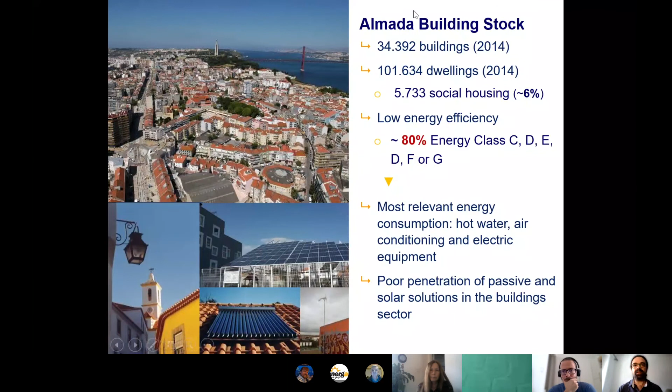This is just an idea of the potential for retrofit in our country. 40% of our buildings need repair, so this is a huge potential to repair and introduce energy efficiency measures. And this is just the number of dwellings that the municipality of Almada owns or manages. There are other national institutions that also have social housing here in Almada.

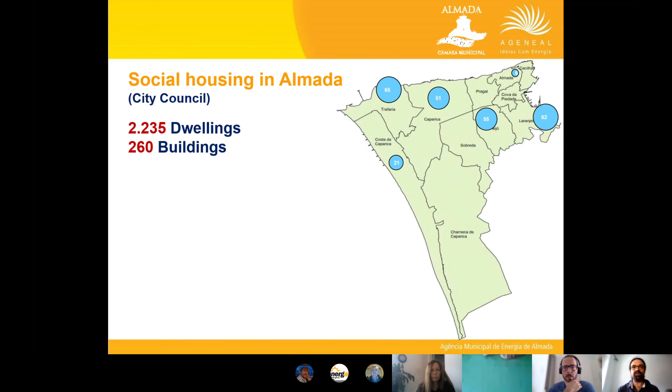The municipality itself has 260 buildings. They are spread across the municipality, as you can see in the map.

This is the two main typologies we have. One, you can see in the first picture, is a kind of normal multi-apartment building, and this represents 95% of the dwellings in the municipality, and it's also quite similar to most residential buildings in Portugal. So it's very representative of what's been done. Although obviously there are some cost constraints in building these kinds of buildings, so sometimes the quality is not the same as the average building, but it's fairly similar.

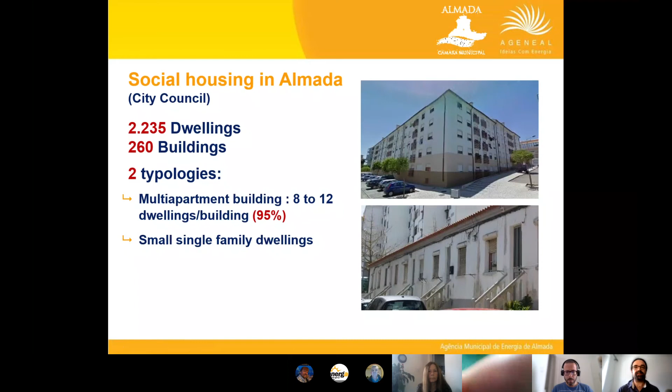And then we have these small single-family dwellings, which are very rare, but we have some - however, we will not address them.

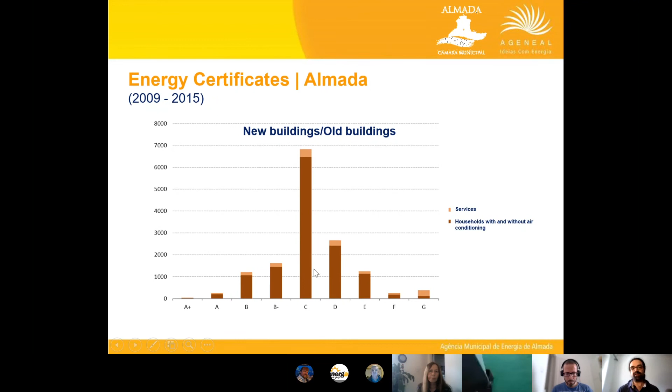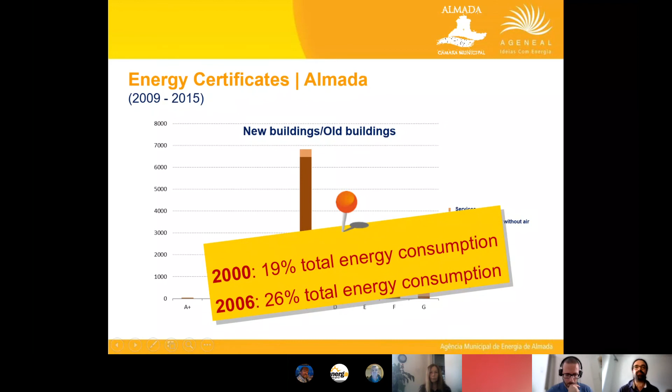So this is again an overall picture. You see that lots of buildings are here in the lower end of the energy efficiency rating, so there is huge space for improvement. The energy consumption in residential buildings has been a bit bigger through the years - I should have some more recent updates, but it's around 26. It has remained stable from this year.

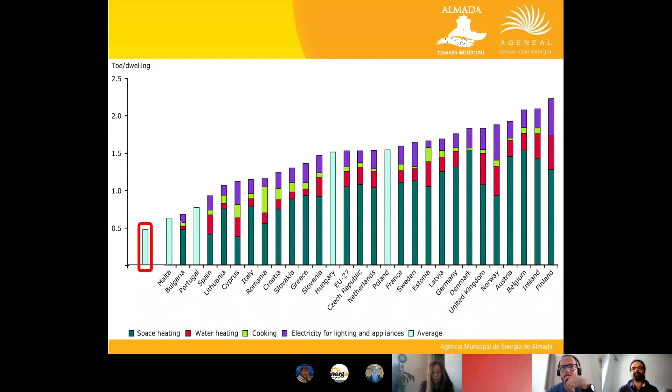This is an old study about the impact of seasonal mortality. Portugal has the highest index in the whole of Europe of mortality related to climate, which is strange because we have very mild weather, but it's explained by the next slide showing the percentage of insulation in houses. Portugal has a very low percentage of insulation. This is an old study, it's much better now, but this was one of the main facts.

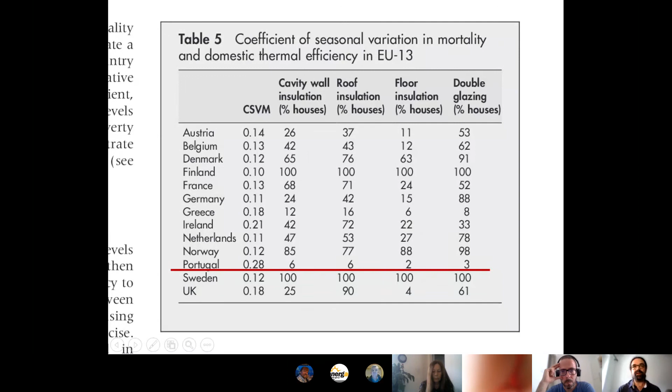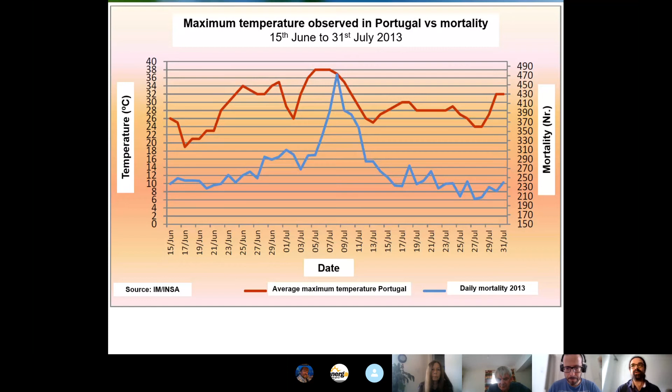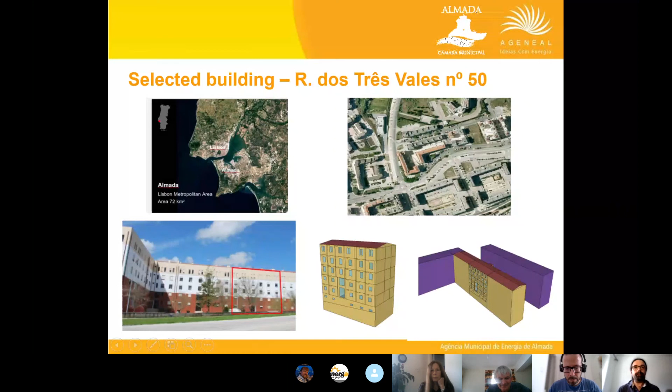Before the intervention, as I mentioned, I won't go into detail, but it was really poorly constructed. So there was thermal discomfort, excessive relative humidity, and also air leakage. We had to address these problems.

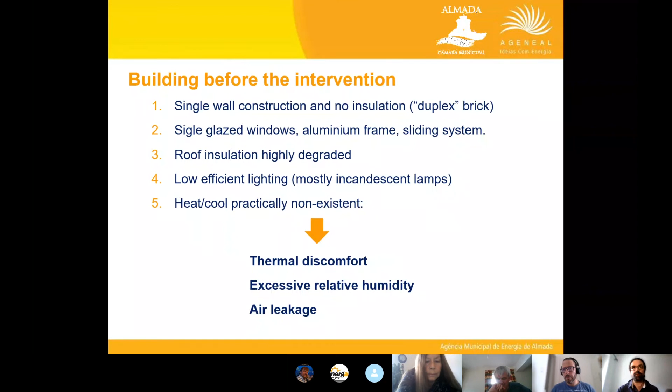This is basically what you can see inside this building. Here you have the windows of the house, which are single glazing windows, very, very drafty. This is the kind of heating you have in a normal house in Portugal - it goes across from room to room. This is the furnace to heat up the water, direct connection to gas.

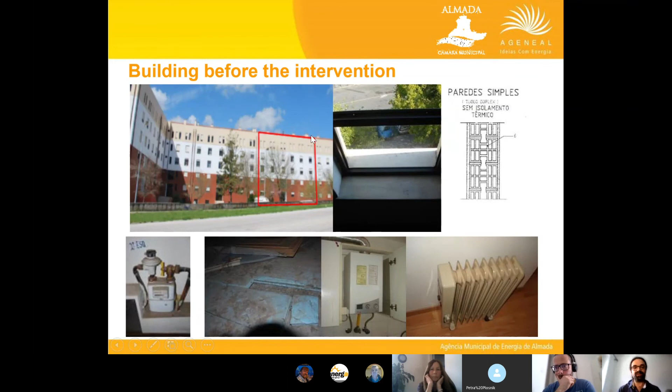And this was the state of the insulation. Actually, there was insulation in the roof, which is good, but it was in very poor condition.

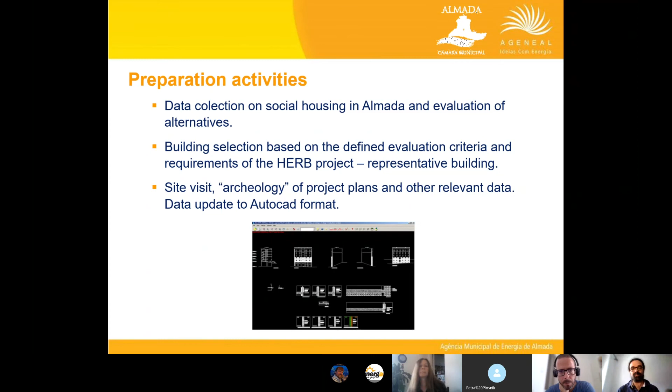So we started to do some data collection. We had to do some archaeology of the plans, because even though this building was built in the 90s, the blueprints were all on paper. So we had to go back and find them and then bring them to digital formats.

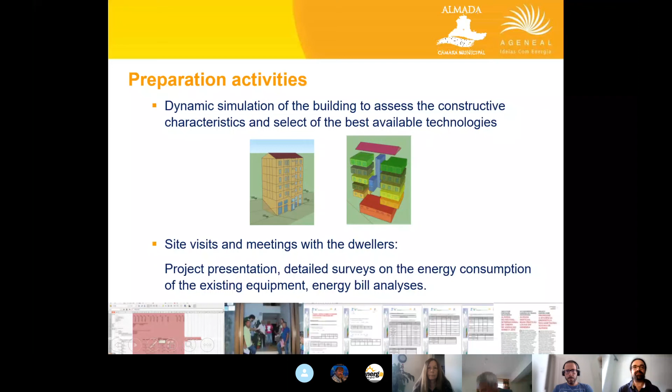What we did there was explain what we were doing, what would happen, that there would be some heavy works in the building, that there would be some problems and issues, trying to get their empathy. Then we also did a huge survey with them, trying to gather as much information as possible to evaluate how things were evolving after implementation.

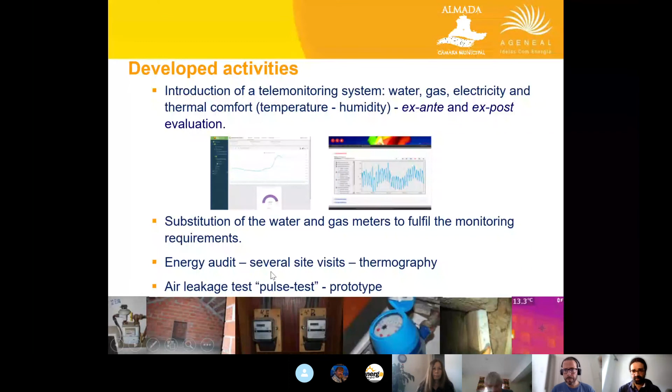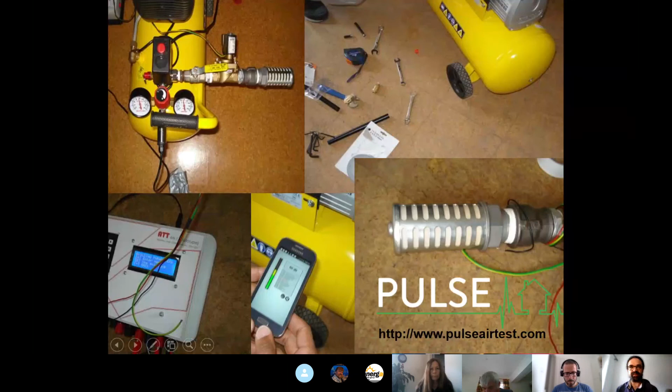A bit more on the technical systems we introduced: some telemonitoring so we could get information on what was going on, replacement of water and gas meters, energy audits, and also this new technology for detecting air leakage. This project involved some technical innovations, but I'm not going into detail on this - obviously it's not the scope of our concept.

So what were the identified solutions and the methodology? Basically, we needed to first get really hard reduction targets. We needed to include innovative technologies, but we had some constraints - we couldn't have any new energy services because people would not bear an increase in their energy bill, even if the house was very well heated.

They would not stand for an increase in their energy bill. There were also some technical restrictions on the available space, and we had to coordinate with other activities existing in the building, namely in the basement there was a kindergarten, a canteen, and a social institution. So we had to coordinate with them.

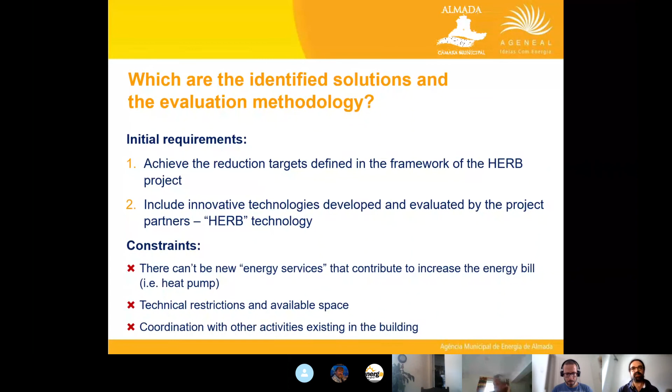We developed some scenarios and tested them using a toolkit developed during the European project that evaluated all the measures in a holistic way. We developed several scenarios with different kinds of technologies to try to define what would be the best, based on our constraints in the building.

I'm already running out of time. This was the reduction of energy savings in the building: 80.6% and 93.6%. But remember, I told you the consumption was very low, so actually this was not the real energy consumption decrease - it's based on what we called nominal conditions.

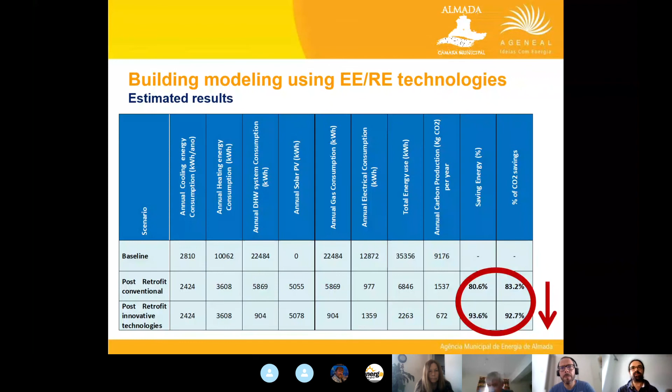If people heated their house, which is the concept we have in our energy efficiency directives, if people heated their house for the whole year, that's how much they would spend. With the new technologies, they would spend 80% less. But this has nothing to do with the real energy expenditure, which went down, but only a little, because they were already spending very low amounts of energy. That's it, basically.

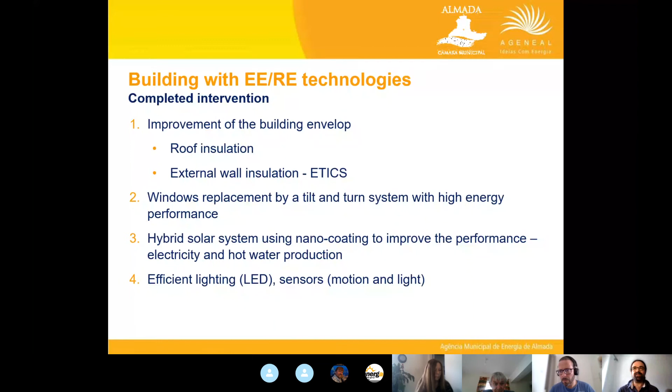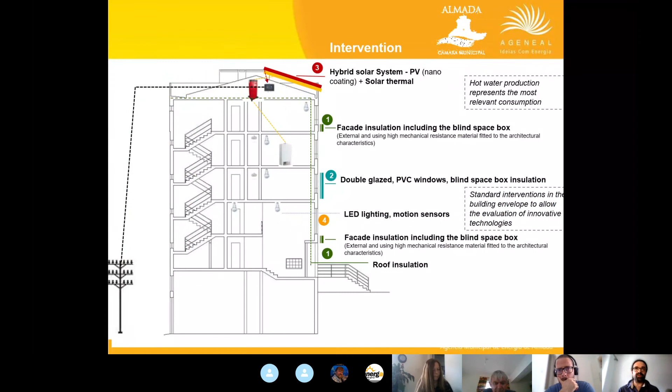So I will skip this part. This is just some of the technologies we introduced. I think we can have a look when we go live into the building, but I'll skip this. Basically, it was facades, and the innovation introduced was a hybrid solar system that I'll show a picture of later.

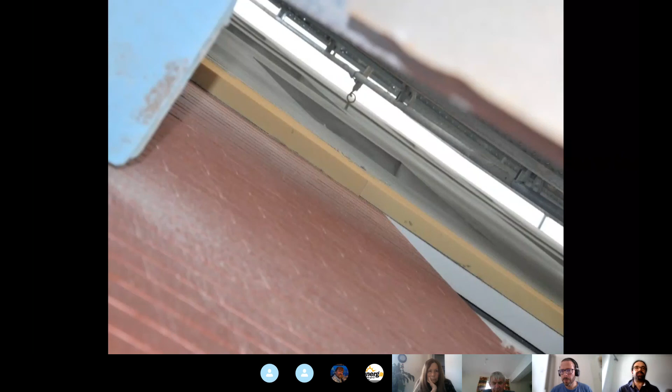We refurbished completely all the facade of the building. This is a picture of the process. Here is the insulation. This was the old wall, and this is the new wall.

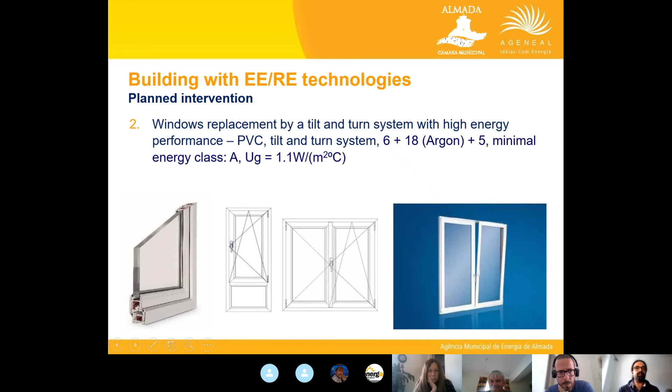And then we replaced all the windows. Here's a picture of the new windows, which we will also see live. These basically had PVC frames, and we had to keep this brown structure for architectural reasons. So the building from outside now doesn't seem like it was intervened, which is quite good. It seems fairly similar to the others nearby, so aesthetically speaking, it was okay.

Then we did this innovative technology, which is a hybrid solar system. It basically heats up water and produces electricity, and it has a coating to improve self-cleaning of the system, which improves efficiency, and it's actually a cheap coating to install.

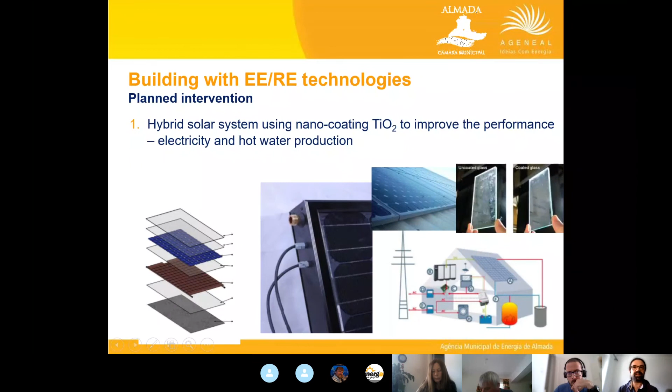So this was the innovative part, and then we gathered all the other more normal installations. This is just a picture of the system we installed there. Some technical details—once again, I will skip this.

Also, we changed all the lighting, also inside the apartments. I had to go with a team to each apartment and check each light bulb, each lamp, each desk lamp, talk to the people about what they would like and what they didn't like, and get LED equivalents in the market. We also spent time with people checking their preferred light colors.

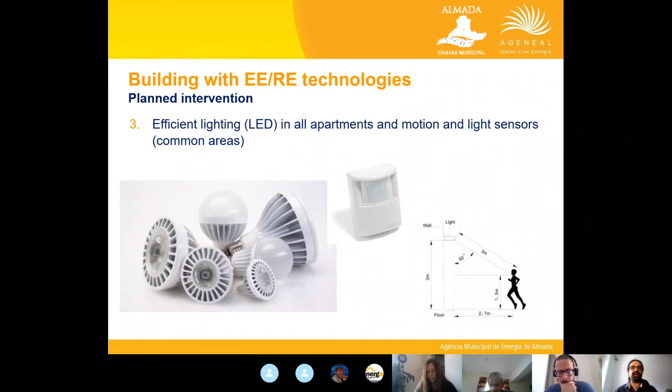Some didn't like white colors, some didn't like yellow colors. We took all of that into account, but for doing this, we needed to be there almost constantly. So every week we would go there and talk with the people and get their feedback on this. It actually turned out quite good, although it was really hard work.

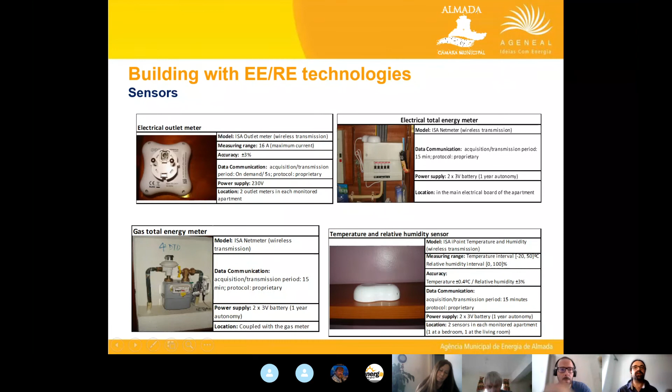Some more technical systems—this is the monitoring system. I'm not going to detail it, but if you have any interest in these technologies, we can share the links and the products themselves. This is actually a Portuguese company that makes these systems. We also gathered data from weather stations, and we had this panel to check how the consumption of everything was evolving in the building.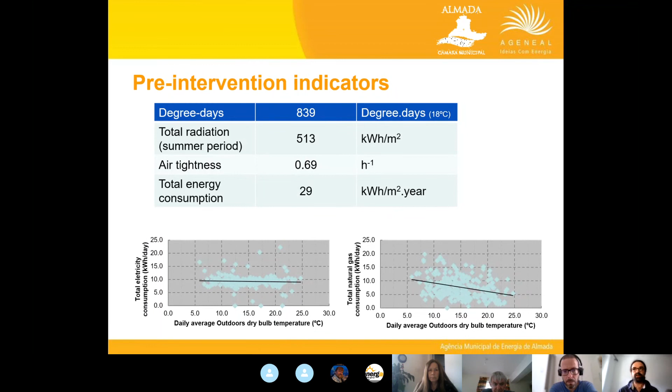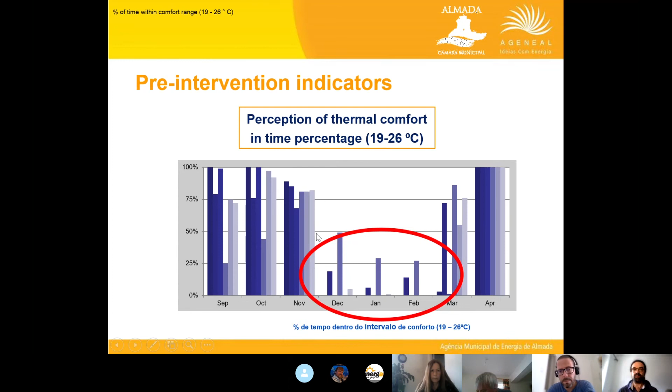We also did an evaluation of thermal comfort. In this graph, you have the percentage of time in which people are comfortable inside their house. You can see that for some of the dwellings—this is for 6 different dwellings—between December and February, people were 0% of the time within what we call thermal comfort, which is between 19 and 26 degrees. So you can see it was not good at all to live in those conditions.

Then we did an occupant satisfaction survey, because this was actually what was important for us, since we could not get a very large reduction in the amount of energy used. They got some savings from the solar energy system because they used to heat water with gas, and now their energy consumption decreased a lot, by 40%. But the important thing was: what about the comfort, the quality of life of the people? Has it improved? So we did this survey.

This is just a small summary of some of the results. On the left side we have the overall comfort level before and after the intervention, which went from 3.1 to 4.6. And the average number of discomfort situations reported—like a leakage in a room, or a draft in the kitchen—reduced from 3.4 to 0.2. So, sorry, that's a 50% increase in perceived comfort and a 90% decrease in discomfort situations.

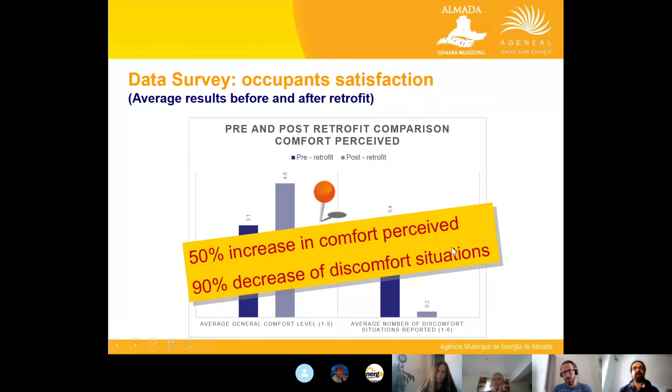So it's something that we took out of this project, which was very technical, but actually the main results were the involvement of this small community of neighbors, and they were very supportive of our work, although we had some issues during the works, as always. But now you will see that they have been quite happy with this intervention. Some say they won the lottery, and in a certain sense, it's a bit true.

So just some thoughts that I have compiled in the last slides. Basically, as I mentioned, the real consumption was not reduced because the base consumption was very, very low, but we had a significant increase of the conditions of comfort of the people. And still we got reduction of the energy consumption. So this is possible. And we also have here a comparison between this holistic and a standard retrofit.

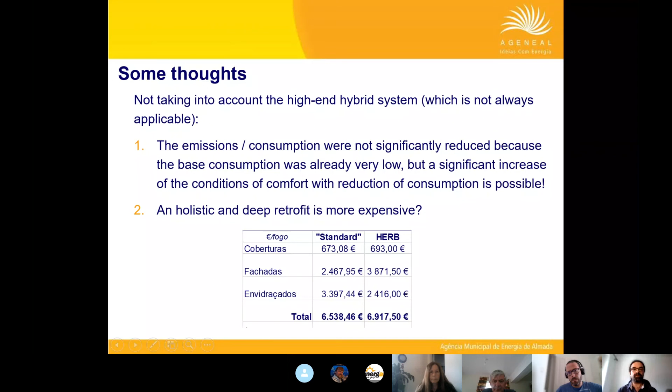So we have some numbers for the standard retrofit and for our building, the HERB building. And you can see that the results on a total, if you take out the very innovative technologies that are not always applicable, we have a more or less similar number of investment in the two different scenarios.

And well, just another perspective, there has been some discussion on what's called carbon gentrification in the cities, especially in cities where there's a lot of investment in green buildings, in carbon neutral buildings. And if this happens, it can actually lead to some greater carbon footprint. And this is basically explained by the income factor that changes a little bit because the people living in the neighborhoods also change.

So one of the ways of also making a balance between these situations is investments in social housing, where the greater comfort is essential, where we can improve the comfort of the building, and then we can reduce consumption wherever possible. So I exceeded a bit our time, but thank you for your attention.

I don't know if you have any questions before we go to our magnificent quiz.

I've got a question, Joao. Thank you very much for that. Can you hear me okay? Yes. Yeah, I'll put my camera on. There you go. Hi, all.

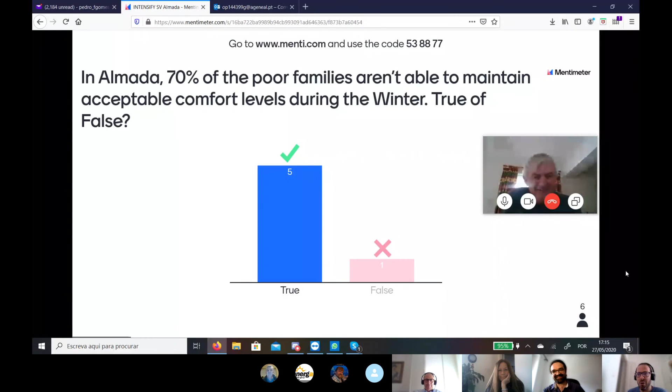So second question, who is the first one? Who is on, Christine? No, Jeremy first, and then Christine, and then Brian, Petra, Joao, and Antonio. Still on time to recover, Antonio, don't worry. Yes, I'm ready. Second question.